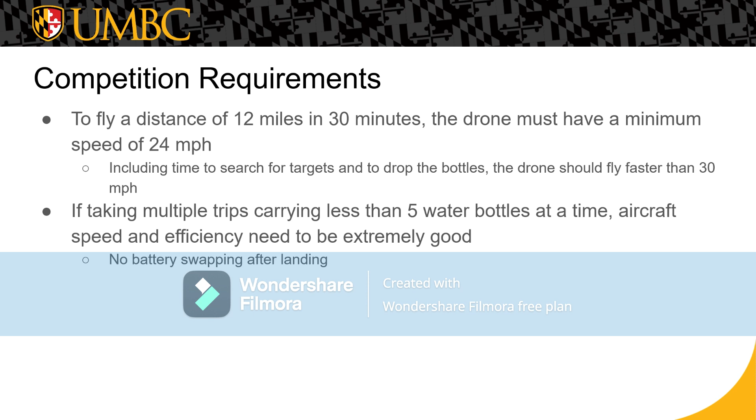If we were to decide to take multiple trips, that speed would go up even more because we would need to refly the 12-mile waypoint course and we wouldn't get any more time. Additionally, we wouldn't be able to swap out our batteries, so depending on what type of aircraft we chose, the battery life could vary between being really good or just not good enough to fly another 12 miles.

Comparing multi-rotors and fixed-wing aircraft, fixed-wing aircraft have superior range, efficiency, and cost, because fixed-wing aircraft usually have 1 or 2 motors as opposed to 4 motors on a drone, and also because of that, there's less electronics that have to go onto it.

On the other hand, multi-rotors are much more maneuverable than fixed-wing aircraft, and they're a lot easier to manufacture because you don't have to cut out foam to precise shapes to get the airfoil shape you want. Also, if planes crash, they tend to be a little bit more difficult to repair.

So the team decided that maneuverability was much more valuable to us, especially when it comes to programming, since it would ease finding targets, flying over them, and dropping the water bottles on the targets much easier. We decided to go with a multi-rotor design.

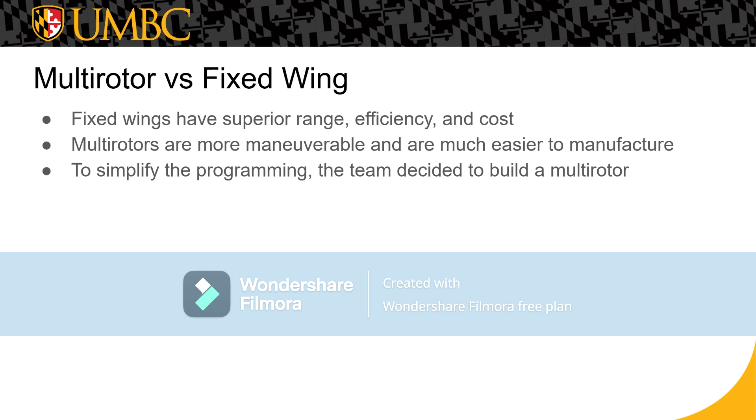As mentioned before, multi-rotor systems can get much more expensive than fixed wings, and the drone that we designed and wanted to build was going to cost about $9,000, but we were unfortunately unable to secure the funding for that drone. So currently, the only functional drone we have right now is a smaller prototype drone.

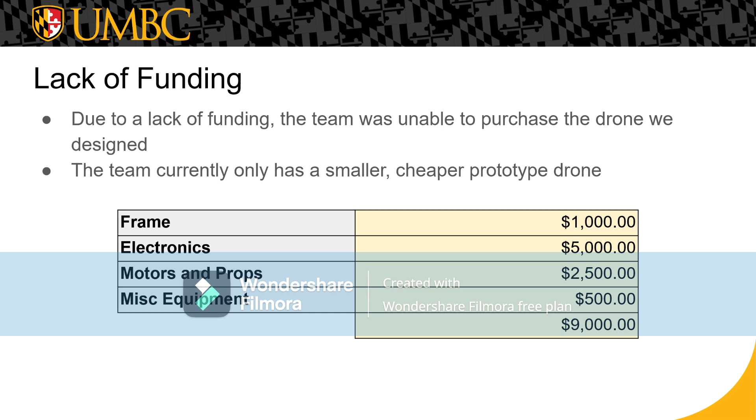We'll come back to that prototype drone and talk about it a little, but the next section will be about our design process for the larger drone.

So the parts we picked out for the bigger drone included a Pixhawk 6C for the flight controller, T-motor 120 kV motors, 120 amp 12S ESCs, 30-inch propellers, and a Foxtech frame which is 1200 millimeters.

31,000 milliamp hour 6S lipos. The plan was to have 2 batteries in series to get a simulated 12S pack, and then put 2 of those in parallel, so we'd essentially have two 12S batteries in parallel.

For the telemetry radio, we were going to use a SiK 915 megahertz radio. And for the receiver and transmitter, we have a FrSky QX7 and a FrSky Access Archer R8.

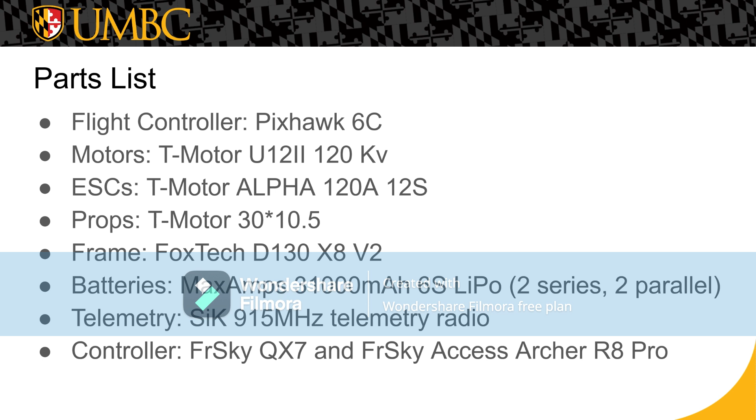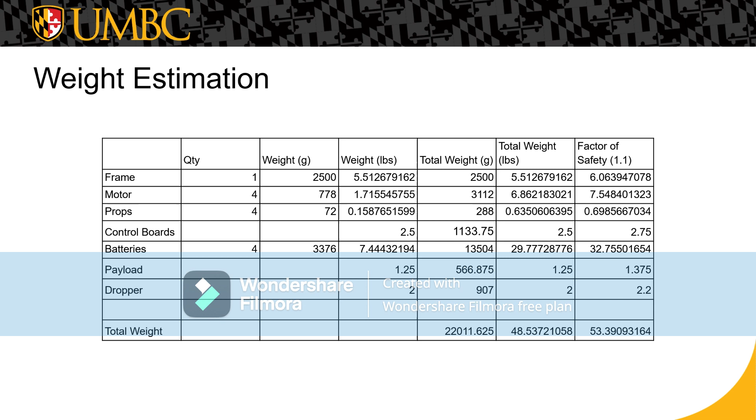Here we just have an estimation of what the drone was going to weigh. On the very far right, we have our factor of safety column, where we said worst case scenario, each part is 110% of the weight that we're expecting it to be. That total weight came out to be 53 pounds, which is just about 2 pounds short of the limit.

When it comes to the motor, the U12-2 was in the sweet spot of all the motors we found. We were researching motors from September up until December and even January, trying to look at all of our options. All the other options we saw either had too low of a thrust-to-weight ratio, or they did have a high enough thrust-to-weight ratio, but we did not have enough flight time.

We were using an online calculator to find all these values because they have a database of pretty much every consumer drone motor, ESC, and battery that you can think of.

Whenever you give it the parts that you want to use, it'll run calculations on the amount of power it'll consume, how much thrust it'll have, the estimated flight time, and a bunch of other useful data. Based on those motors, T-Motor recommended on their website that we also pick the 30-inch propellers and 120 amp ESCs.

With this selected combination, we would get a 2.3 thrust to weight ratio with about a little bit over 30 minutes of mixed flight time and a top speed of 45 miles an hour.

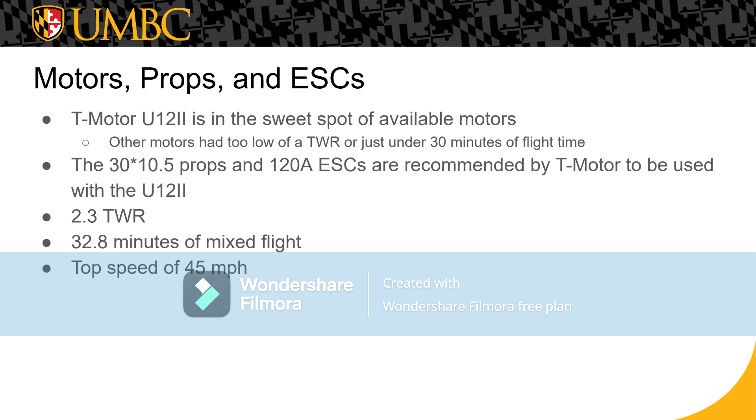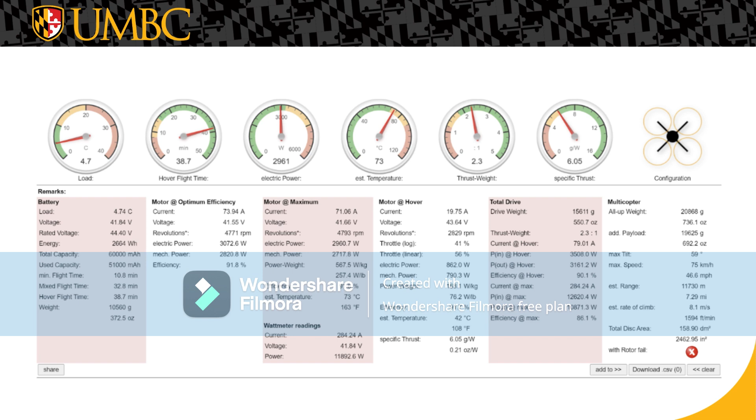Here's a sample of the sort of data we would get from the drone calculator. As you can see, it has all of the information like the thrust to weight ratio, how much power it consumes, and how much time it can stay in the air, like hovering or mixed flight time.

We did take this data with a grain of salt, especially because this software was mainly created for use with RC planes and was eventually ported over to be used with drones. Some of the calculations, especially the range calculations, aren't as reliable as the plane ones.

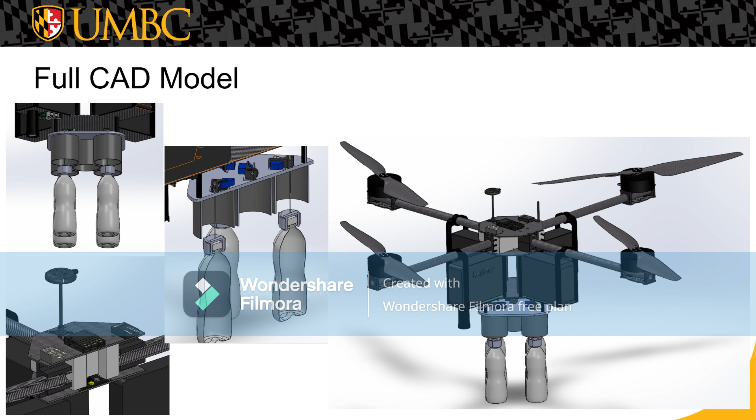Here we have our full CAD model of the larger drone. It has the payload mechanism, where the electronics will be mounted, as well as how we would mount the 4 batteries onto the drone. The team selected this frame because with 30-inch propellers, the minimum size that the frame would have to be is 1100 millimeters, and this one's 1200, so it meets that requirement.

As advertised, this frame can support carrying cameras below it, as you can see in the picture, but we wouldn't be using a camera of that size. We'd be using a smaller one for the image processing - we'll get into that later. We would also put the payload mechanism underneath.

The frame is also advertised to be used with coaxial motors. However, we would only be using 4 motors instead of 8 because we don't need the additional thrust of 4 extra motors.

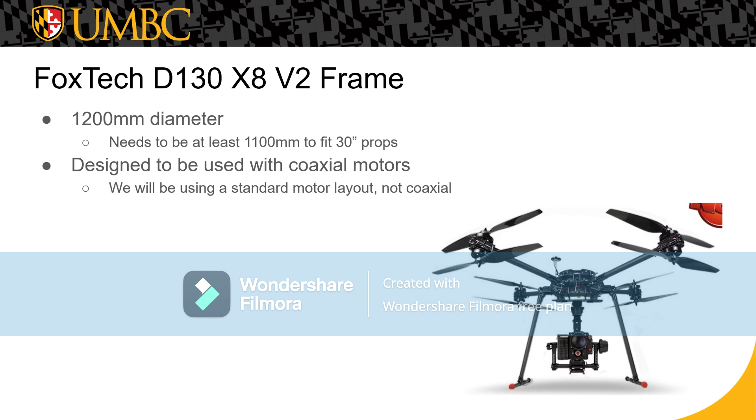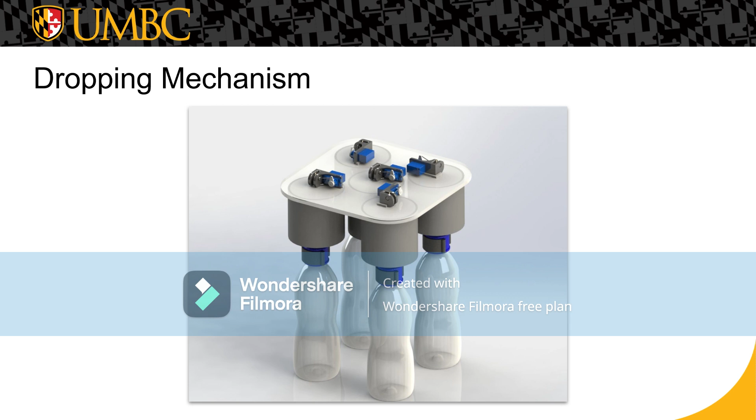Here's the 3D model of the completed payload mechanism with the water bottles attached and the release mechanisms on top with the servos. Each water bottle weighs about 1 pound, so each portion of the payload mechanism would have to be able to support that weight.

The mechanism has an easily removable clip as per the competition requirements, so the judges are able to remove the clips and get the water bottle back fairly easily.

To ensure a safe landing, each water bottle will have a 4-foot diameter nylon parachute. To release the water bottles, there will be a string from the top of the bottle that will loop around a pin that gets released by a servo.

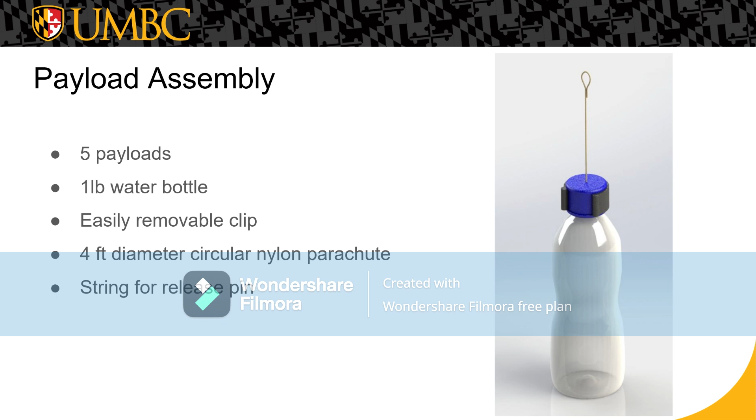Here's just a cross section of what the clip is going to look like around the water bottle. Each portion of the payload mechanism will just be a duplicate of each other.

They will have 9-gram servos, which have a torque of 1 kilogram per centimeter, and attached to the servo horn will be a rod that will also be attached to the locking pin that holds onto the rope that's attached to the water bottle.

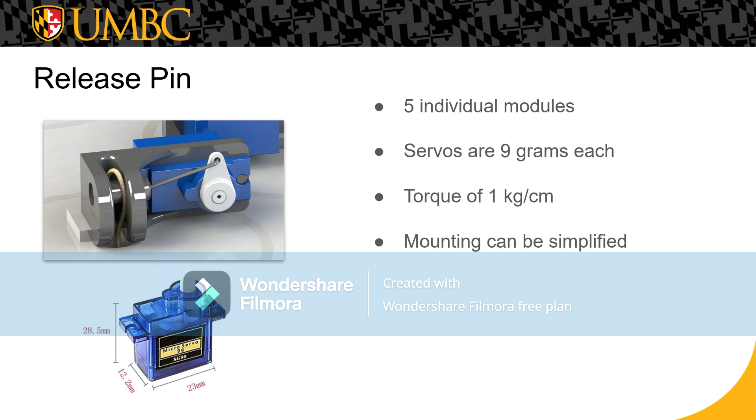When the servo turns, it'll pull the pin out of the way of the rope, and then the water bottle will be able to fall.

In the cylindrical section right above the water bottles, there will be space to store the parachutes before the water bottle is dropped. Not including the water bottles, the payload mechanism weighs a total of 1.6 pounds.

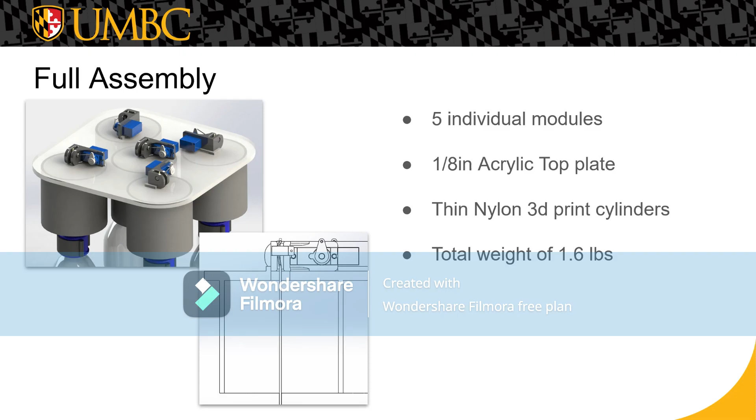So the order of the autopilot sequence is as follows. First, from the ground station, we will upload the GPS waypoints provided by the judges, and then once we are ready to fly, we will swap the quad to mission mode, and it will follow all the waypoints.

Once the mission mode is finished, we will then switch to offboard mode, which allows external devices such as a Raspberry Pi to control the drone's movement. We'll get more into that later.

The Raspberry Pi will tell the quad to fly a search pattern as it looks for a target through a camera.

Once a target is found, the Raspberry Pi will tell the drone to get directly above that target to verify that it is a proper target. Once the drone is directly above it, the Pi will then control one of the servos on the payload mechanism to drop the correct water bottle.

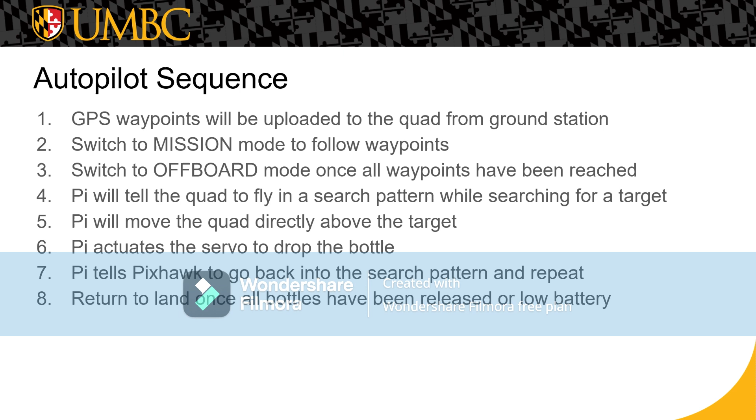After the water bottle is dropped, the Pi will then tell the quad to go back into that search pattern, and it will repeat until time is running out or until all of the water bottles have been dropped.

The autopilot software that we chose is PX4, because our club advisor and also a company that was helping mentor us had experience with it. So if we ever needed any help, we could just ask them and they'd be able to answer our questions. In order for the Raspberry Pi and for our ground station to communicate with the flight controller, we will be using the Mavlink protocol.

It's built into the Pixhawk and it's pretty straightforward to use.

Using Mavlink, we will be able to upload the GPS waypoints from our laptop through the telemetry radios and then tell it to start flying the mission. For the Raspberry Pi to control the drone through Mavlink, it will be using Python and the MAVSDK library. That code will be able to detect whenever the mission is finished and then go to offboard mode and perform the search routine.

To test some of the autopilot code, we were using the Gazebo simulation software, and we were able to interface QGroundControl with the autopilot simulation as if it were the actual drone.

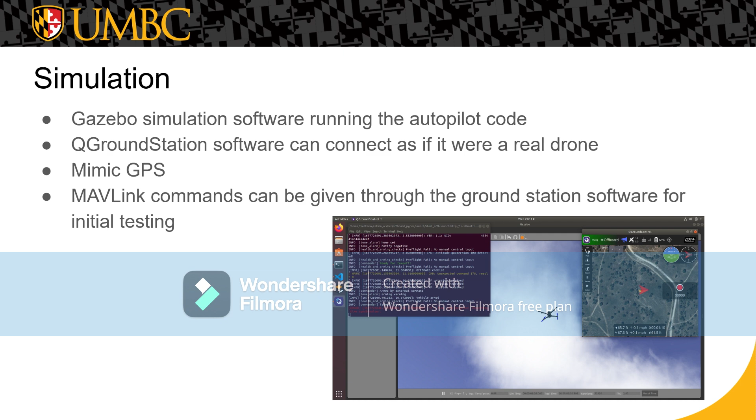Using the Python code, we were also able to put the geofence into a text file and read that text file to get all the GPS locations to make the fence polygon, and then upload that to the simulation drone. We were able to see the proper fence around the airfield through the ground station software.

As stated before, we were planning on using a Raspberry Pi 3 to run our custom Python code for the search pattern and to also control the servos when we're above the targets.

The offboard mode that the Pi would be able to use through the Python code, you could give the flight controller a velocity vector, a position to go to, or even an acceleration vector, and the drone would obey those commands and just go wherever you want it to. That would be how we would give it the search pattern. We just tell it this velocity and keep telling it to do that until we find something on the camera. The Raspberry Pi will be using a camera for target detection, and it will be using the OpenCV image processing library to do all this image processing.

OpenCV is compatible with Python, so we can use Python for the image processing as well as interfacing with the flight controller through MavLink.

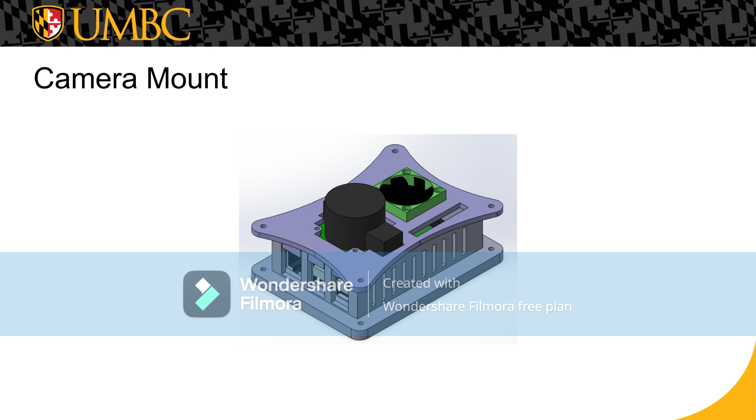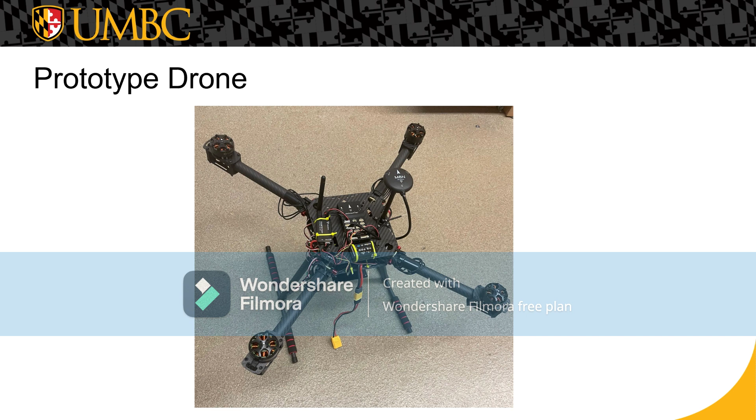So onto our prototype drone. This is currently the only drone that the team has right now. We were able to acquire some of the parts from the original parts list, such as the Pixhawk 6C, the telemetry radios, and the particular receiver that we chose, but stuff like the batteries, motors, and ESCs we weren't able to get. So on this drone, the main difference between this one and the big drone we want to build is basically just the frame, propellers, speed controllers, and battery.

We picked a bigger battery for this prototype drone, so we picked a 4S Turnigy 10,000 milliamp hour battery.

On the maiden flight of the drone, we did discover that there were thrust issues. In particular, in order to take off, the drone needed at least 75% throttle to take off. As we'll see in the video, as it runs through a waypoint mission we uploaded, as it tries to go from one point to another, it just falls out of the sky, and that's most likely because as it's tilting to gain some horizontal speed, it's losing some of that vertical thrust, and it just can't support itself and starts falling.

40 feet this time. Dude. It's spinning. Why is it spinning? Why is it going so slow? Whoa! What is it? I'm taking over. Alright. I think you're able to set.

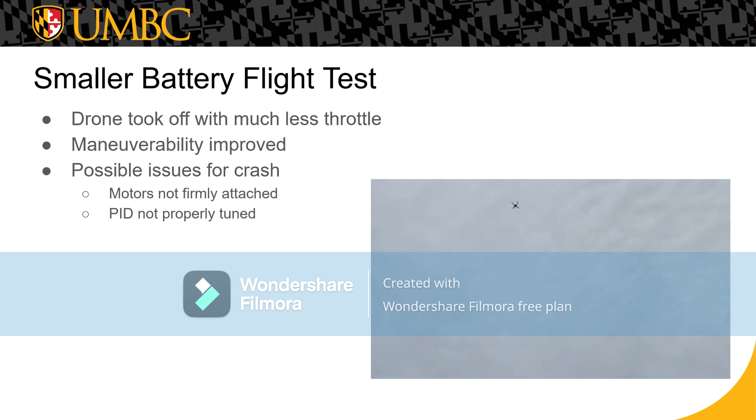any tuning at beforehand. I'm gonna take it off. Where is it supposed to go? 40 feet, then over that way. Holy smokes! For so much faster. Then to the right, then it's gonna return to the landing spot. Oh, dang you! Dude. Dang it. Oh, wait. What? I think it goes to 100 feet before it lands. Okay. Yeah, it went to 80. And it's not right above us. You might wanna move. Yeah. Don't fall. Oh, is that you? No. Kill switch.

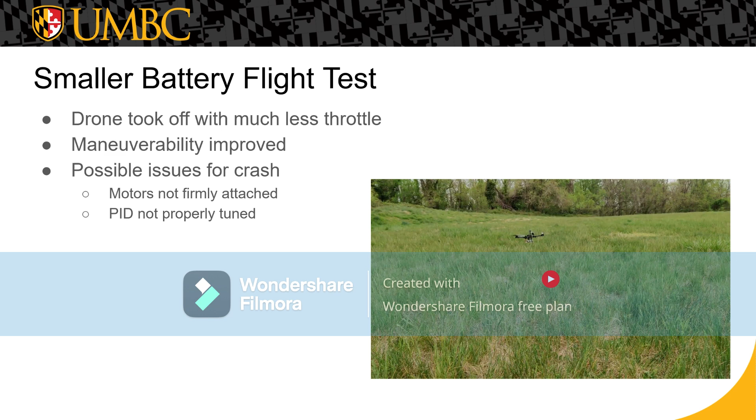As a result of only having a couple days for test flying, only simple tests were performed. We didn't do any in-depth autopilot testing, especially with the Raspberry Pi. Some code was run through the simulator, but that was just for the off-board mode as mentioned earlier. No long-range communication testing was performed. We didn't put the drone through an extensive amount of flight hours. It was probably even less than 30 minutes total.

We didn't get the chance to 3D print our payload mechanism prototype or to iterate upon it, and we also didn't do much image processing testing. All we did was basically just the doorway example you saw earlier.

This is all partially due to us spending a lot of time in the beginning of the year with the whole team researching motors and how to get the quadcopter to even get off the ground and fly for as long as we needed to.

Some of our issues were partially due to funding, because the drone that we had simply couldn't meet the requirements that we would need to test, such as flying 1,000 feet away from the pilot or staying in the air for 30 minutes. It could barely lift itself off the ground with the big battery.